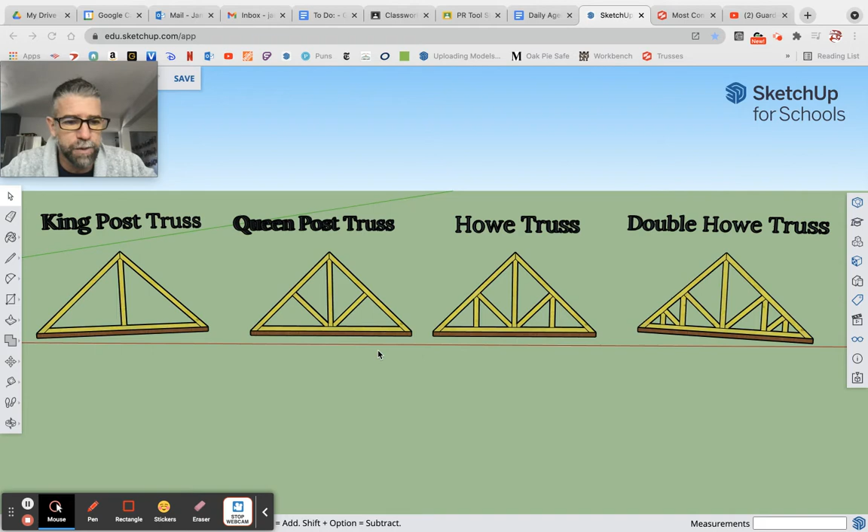It's going to make your life a lot easier. So let's dive in. We're going to start from scratch, and I've got my tools a little messed up as always, so let's fix that.

Let's start with a king post. We're going to build a king post truss, and that's just basically a triangle on top of that bottom. Remember this dark brown? That's actually a roof joist. We're just building the light color on top of it.

Okay, I'm back, had to plug in my charger cord. Now, I did not put dimensions on here, but this is the same as the first truss assignment, which means it's 5 foot. I'll just put it on when I build it. It should be 5 foot from the bottom up to the peak of the truss, and then 5 foot from that center point out to the edge.

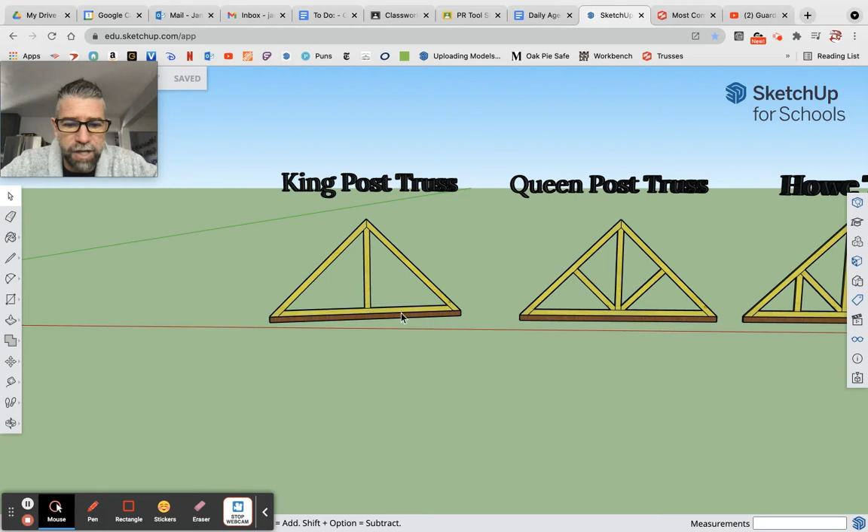And it's just a big triangle on here. Notice that the bottom is a single piece, and then each of the two sides is a single piece, and then the center piece of the truss is on top of this bottom, and it cuts off. It doesn't go in between those two upper ones.

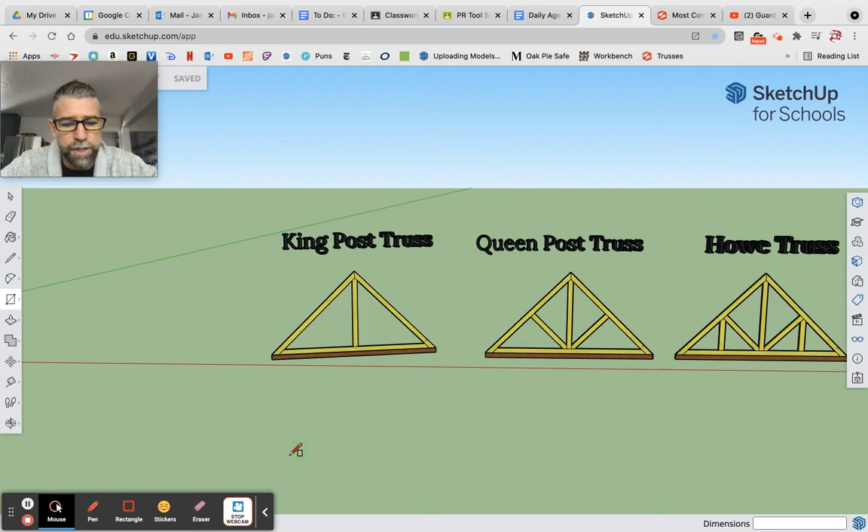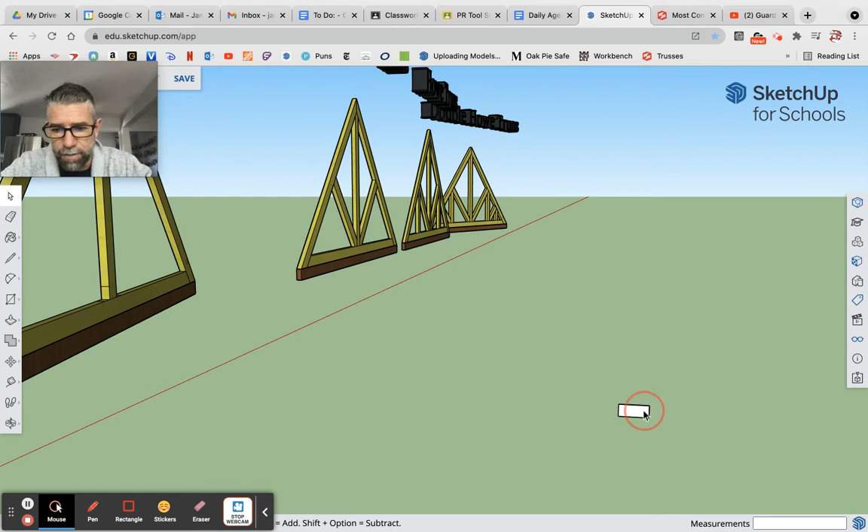We can see it didn't go on end like I want. Easy fix, I'm going to rotate it, or you can use the move key. Move actually doesn't give us the little red arrows, so I'm going to go to rotate, which is the Q shortcut. See how that changed? We need it to be red, yes. Nope, we want the red corner. Give me red, there we go. Red, and then grab an edge, and then just stand it up. There we go. Now we'll push pull it.

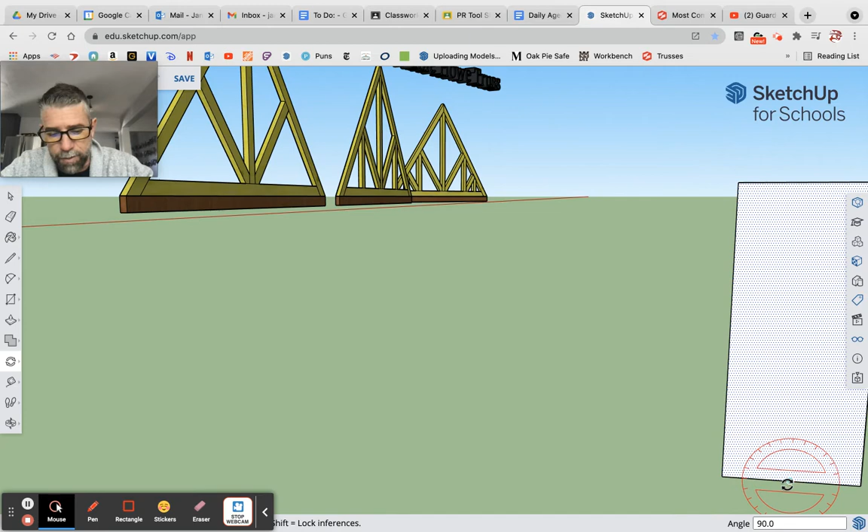Now, since these guys are 5 feet, the truss is 5 feet from center to edge, that makes 10 feet across. So we're going to push pull that guy, make him 10 feet. Don't forget to group it.

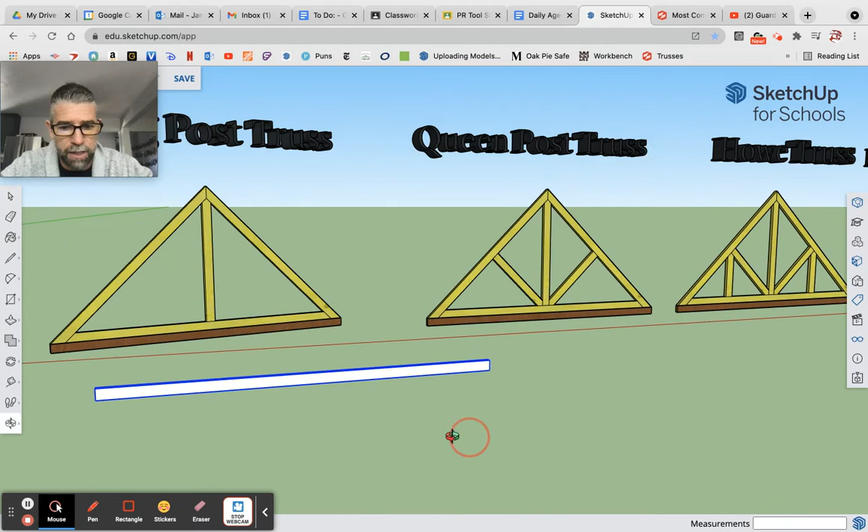And then at this point, we're just going to copy him for all the trusses, so that's the only roof joist we need to make. We'll make him dark so we remember he's not part of our trusses.

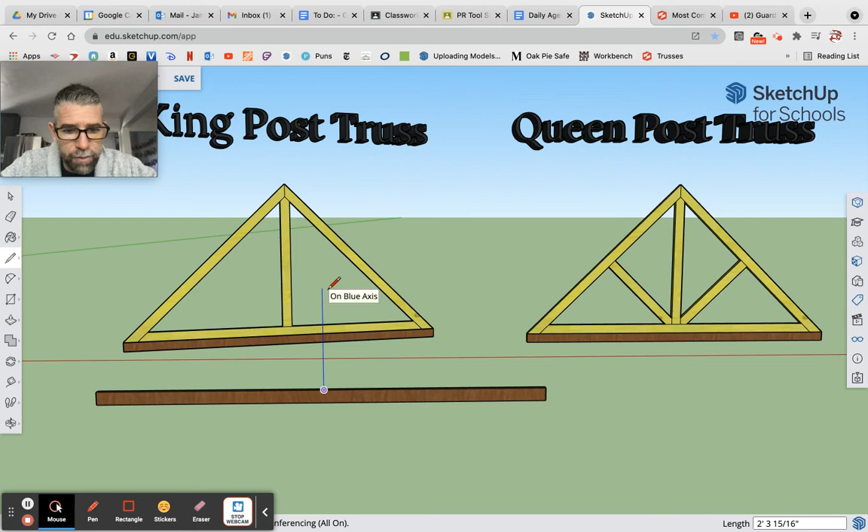Okay, so now you're really using the line tool a lot. We're going to start with probably finding the center point, and we're going to draw a line right in the center there, and it'll tell you when you find center. There it is, midpoint, and then make sure it's blue going straight up, and remember we want 5 feet to the very top. So there's our 5 foot, and then we can just finish making the triangle.

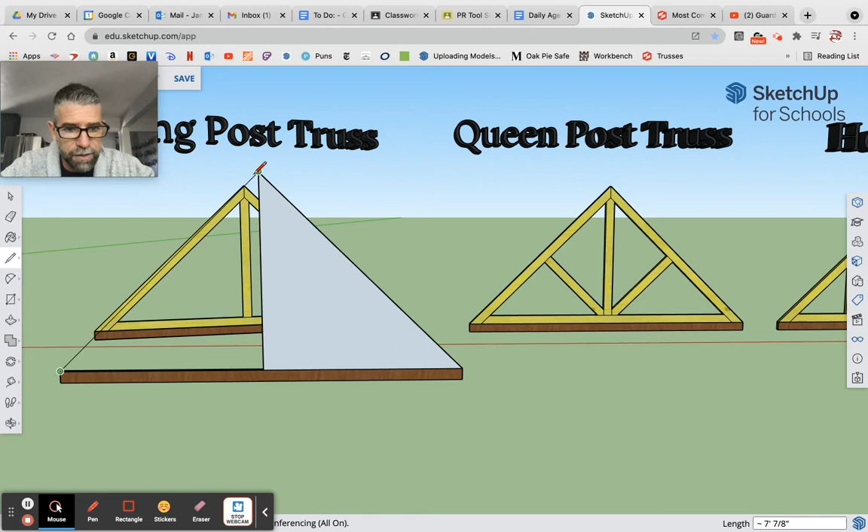Now notice, if you're not careful, you're going to connect to the back edge of that 2x4 instead of the front edge, and then you're not going to have flat planes. Things are not going to work, aren't going to fill in, and it's going to be frustrating. Now I'm going to build it, it really doesn't matter - the first one I built half and then flipped it, but honestly it's probably the same thing either way with something this simple. Now we've got our basic triangle, so let's run some guides.

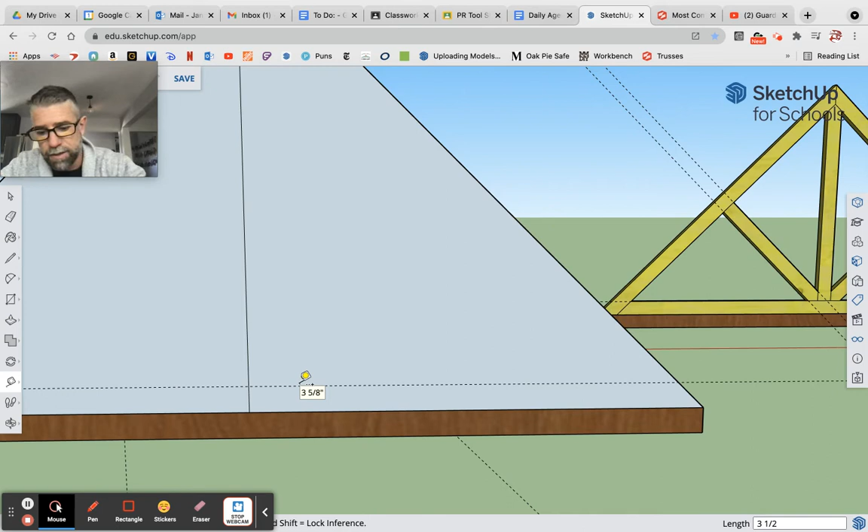So I'm going to start with a guide here at the bottom. Since that 2x4 is going, it's 3.5 on end. There's our line for that. So now I can just run that all the way across, and then just finish connecting it.

I'm just running all the way around. So we've got that guy. And if I erase that a little bit, now we've got that bottom 2x4. Notice here, it should be cut off on the inside.

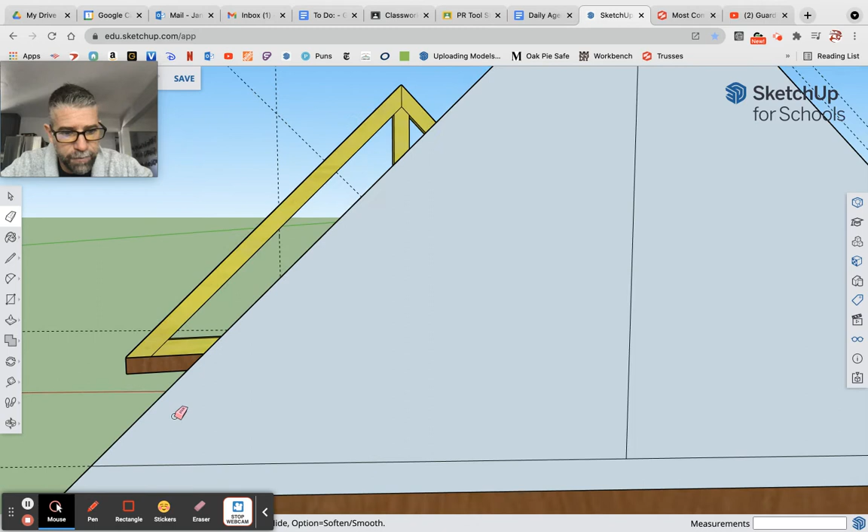So we're going to make our next guide, and we're going to go. Notice the purple says we're perpendicular to the edge. So the little line we're drawing is perpendicular to that edge, running parallel on the face. That's what we want, so you want it to be purple to make sure it's going the right direction.

Again, lots of 3.5 because that's our line. Now, instead of starting here, we could start here, and that would leave the bottom edge as the base of the truss. We don't want that. We want to go from here, and we'll erase the other line. We'll go all the way up for now because you can always erase it later. So we'll erase this guy, and I'm looking at this guy as my example, so we'll erase that.

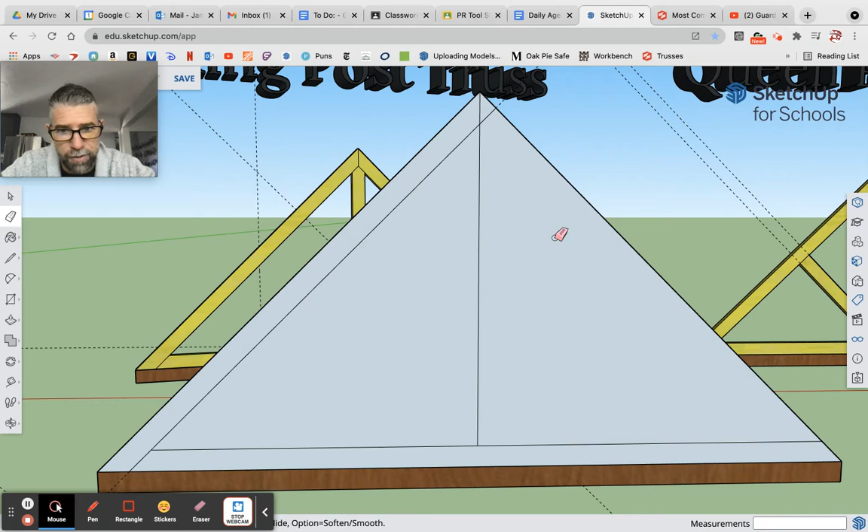So now we've got our bottom 2x4 and then our side 2x4. We'll just do the same thing on the other edge. Again, it's purple, 3.5. There you go, draw the line.

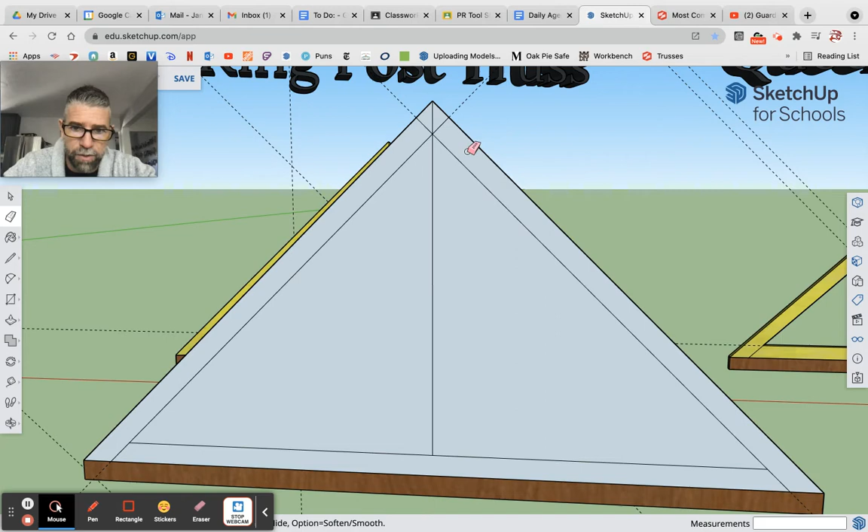At this point, I'll erase this piece here. So notice we've got our 2x4 on the bottom, we've got both of our two side piece 2x4s, and then at the top we've got to erase some stuff. They're going to come up to that peak right there. So we're going to erase this guy and this guy, and there we go - we've just got the two meeting at the top.

Now, this has to be split into a 2x4. That line is right down the middle of the 2x4 that makes the truss. So when you do your guides, you can't do 3.5 - you do half of a 3.5, which we talked about in the last video. Do you remember what half of 3.5 is? Think about that.

Remember, we do half of the 3, then we take half of the remaining half and add those together. Half of 3 is 1.5. Half of the remaining half is a quarter, so that 1.5 plus a quarter is 1 3/4. Now we can either do another 1 3/4 from the middle, or we can do a full 3.5 from the outside edge. Either way will give us the other guide.

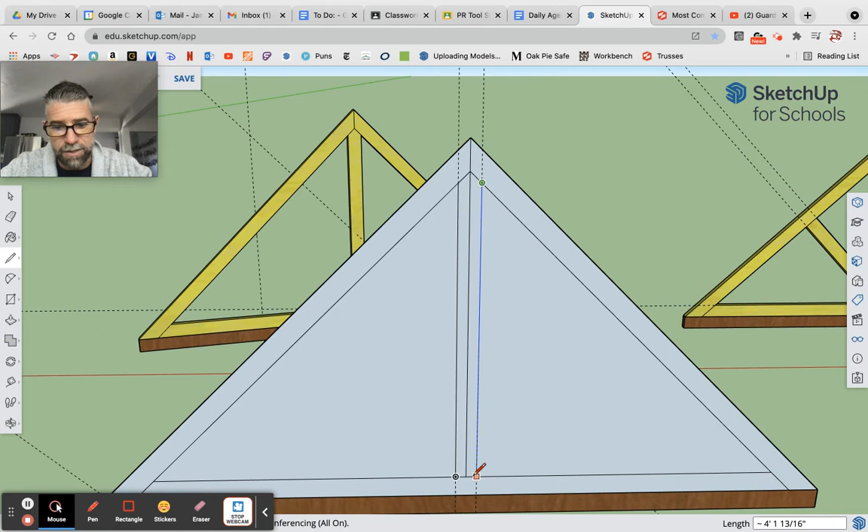Finish those lines, and we're not going to go down here because we want to leave that a solid 2x4, and we're not going to go above that. I'm just going to trace around here - probably didn't need to because it's all just a face right now. And erase the middle. Okay, so that's what you want.

And if we turn off our guides, it looks a bit cleaner. There you go. If we delete out these two, we've got our basic king truss. We just need to add thickness to this guy.

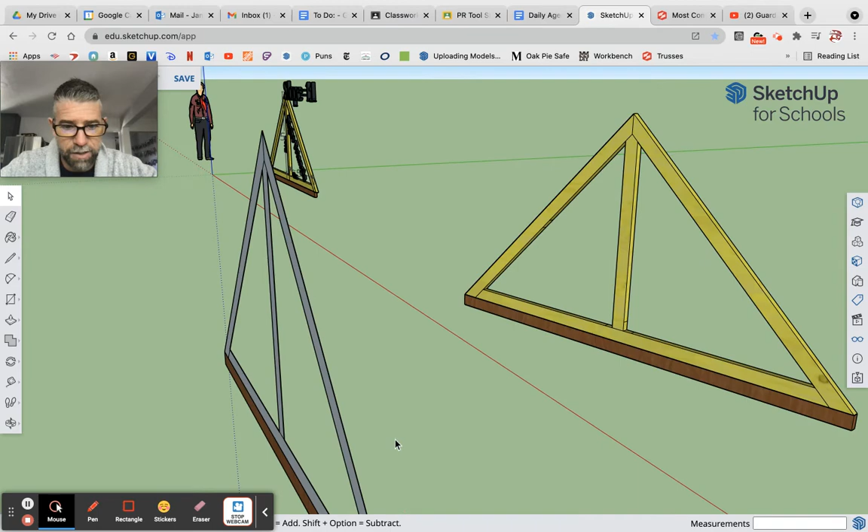Okay, he's still flat, so get to where we can see that edge. I like to do push-pull from the front. And it's just not letting me. Sometimes my rotate tool is a pain in the butt.

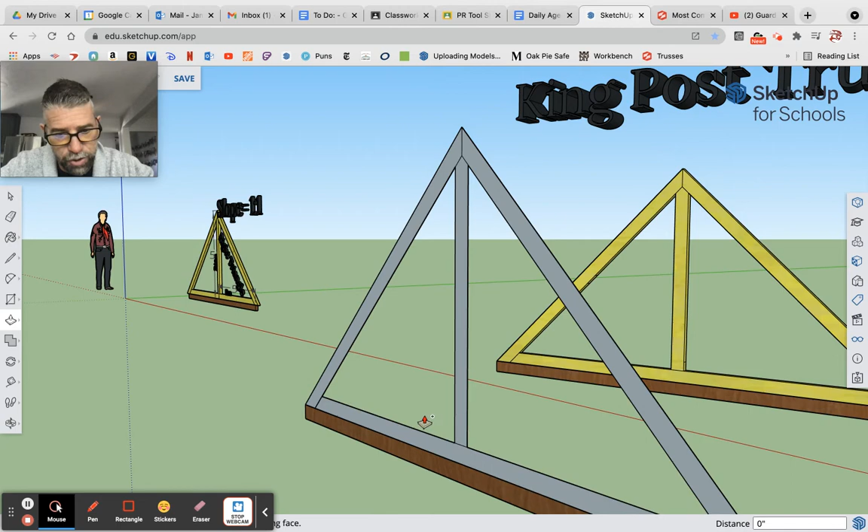So we'll start with the bottom. I can't see - now notice it's taking away the front face. Easy fix, hit Option or Control - it's Option, now it's there. I have to rotate around because I can't see the outside edge.

And there we go. I think I probably will go from the back to push-pull these, but I have to look and make sure the faces are staying there. Just do all 4 of your pieces, and make sure that the faces are staying there. See, that one's not, so I had to fix it. But now I can see the outside. There you go.

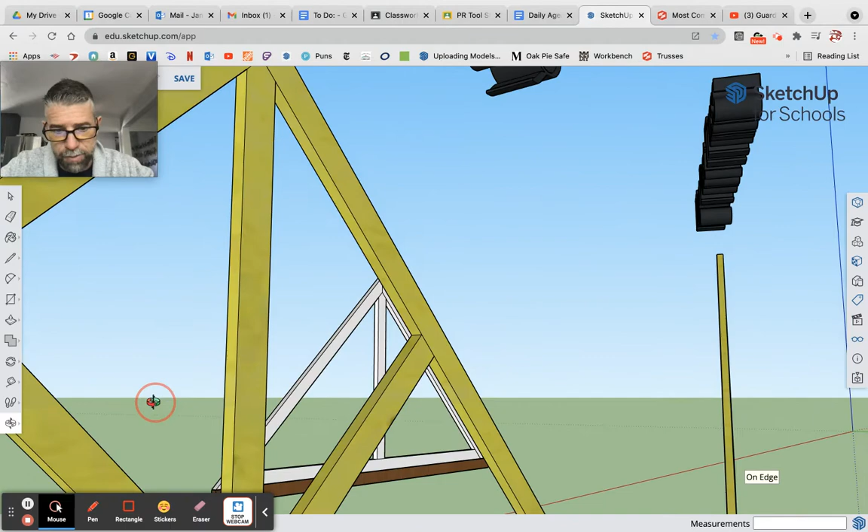And it won't let me get to that edge. There we go. Now don't worry about the colors, we're just going to paint it all wood texture anyway. But there you go, that's a king post. You just got the simple triangles, okay, just a simple triangle and one going up the middle.

Go ahead and group the whole thing. Don't forget, group it, texture it. We're done, okay, there's our king post.

King post truss, just like the original. We could just get rid of the original. And there you go, there's your king post. We'll just build from here.

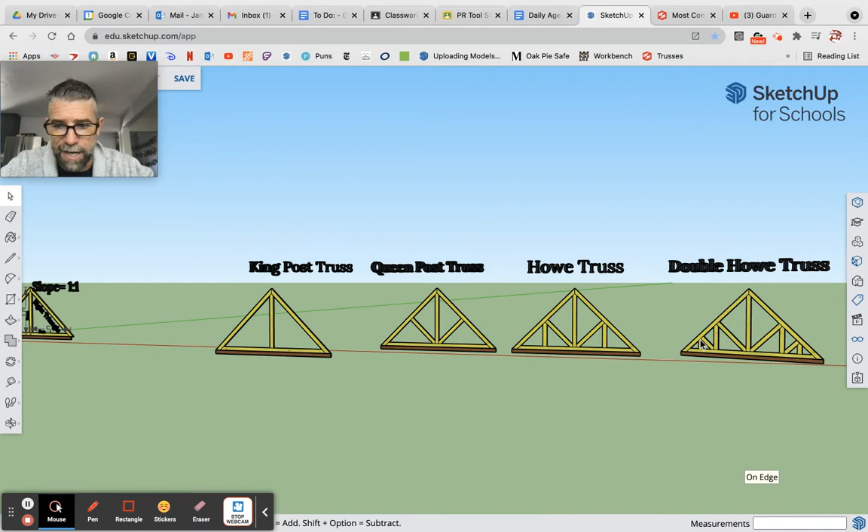Now these do not need to be created from scratch. Do not waste your time. Take him, grab this guy, and I'm just going to do a move on these two. Move them over here.

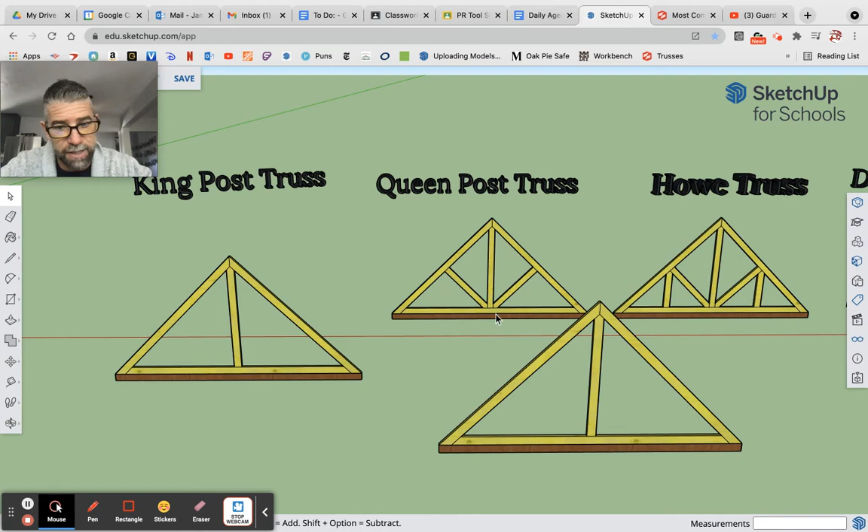And again, if we look behind, we're just going to take the king and turn it into a queen. All you need to do is add these diagonals here. So if we're going to go in and add those diagonals, we're going to go to the midpoint.

So start a line, and again we just need to find - there it is, there's the midpoint on that line. And just right to that front corner. And we're only going to do it on one side, then we'll just copy it over for each of these from here on out. All we need to do is add that one 2x4.

Now notice this is the middle of that 2x4, it's going right into the corner. So you don't want to do 3.5 because then you'd have it offset and it wouldn't be right in the corner. So do again half of the 2x4, which is 1 3/4. You're probably going to memorize that number pretty quickly - 1 3/4 is the half of your 2x4.

Okay, my guide disappeared, what happened? I need to turn my guides back on. They just get a little messy, they get everywhere.

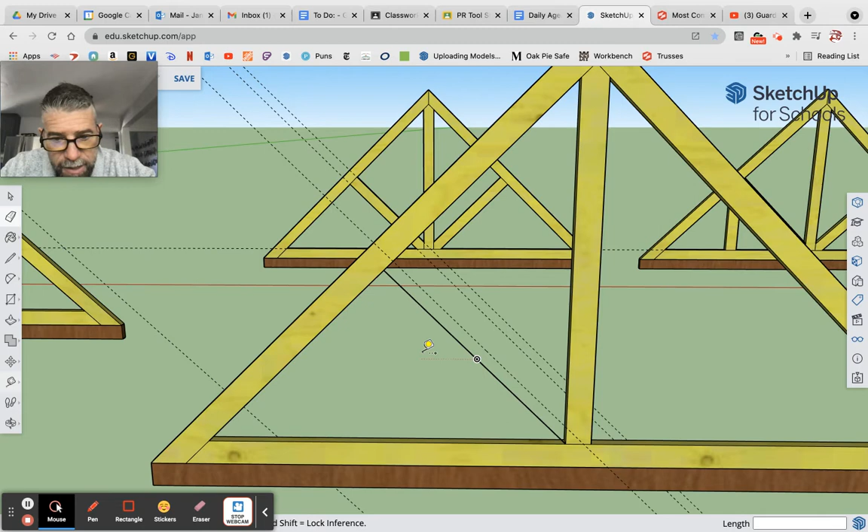And then from here you can either draw the full or draw another one from the other side. And I don't know why I'm not seeing the guide. Let's try that again - there we go. A purple, then you know you're heading in the right direction.

Now you need those extra lines. You're going to connect and just draw all the way around - you're outlining that whole 2x4. And once you do that, it'll all appear.

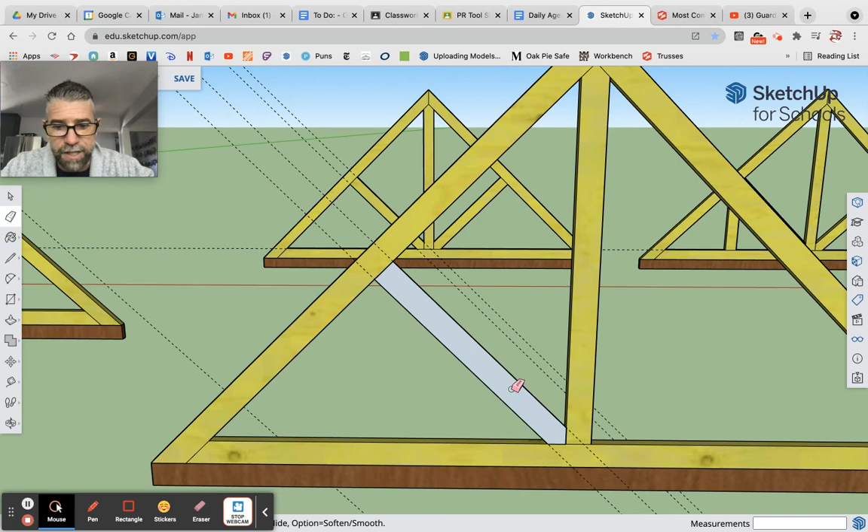Okay, and if it's not, just there's somewhere you missed a line, just go back and redraw it. Okay, erase the center - there it is. Okay, really easy - push, pull, give them some thickness. Any edge that goes there is fine.

Now I'm going to group this guy because I'm going to move him. We're going to ungroup it again in a second, but I'm going to group it to move it. I'm just going to grab the corner, move it over. Don't forget to copy it.

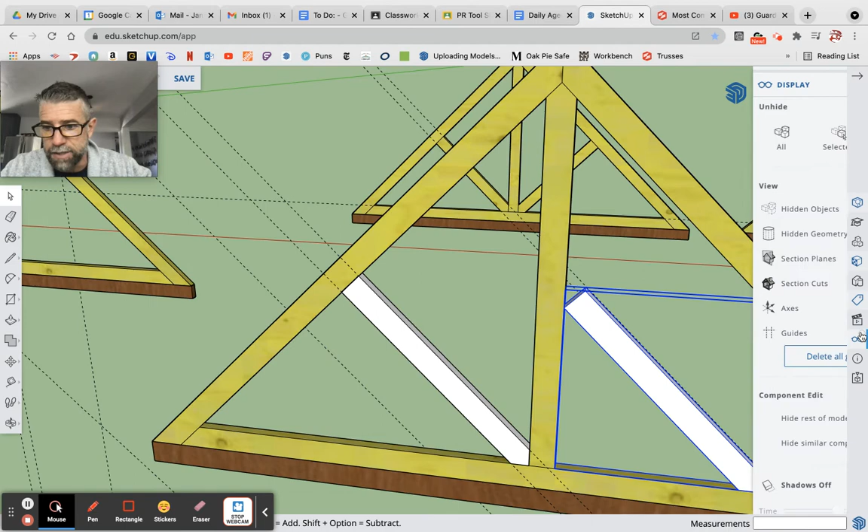Now let's get rid of guides - they're super annoying when you don't need them. Now notice that's obviously a problem, so we have to rotate this guy, okay?

Easiest way I think is just use the move, and then you can just click any one of these red pluses. You just do a 45-degree rotate, and boom, there you go. Or is that 90? It's probably 90.

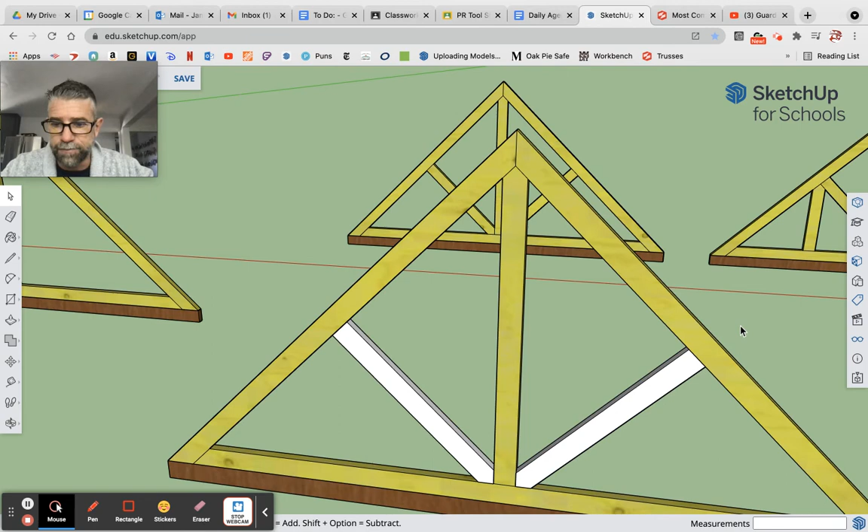Now notice that these guys are grouped and the rest of your truss is grouped. Rather than have individual pieces, I just want all of this to be one group. So what I'm going to do is explode the group of that guy - I'm going to explode that group.

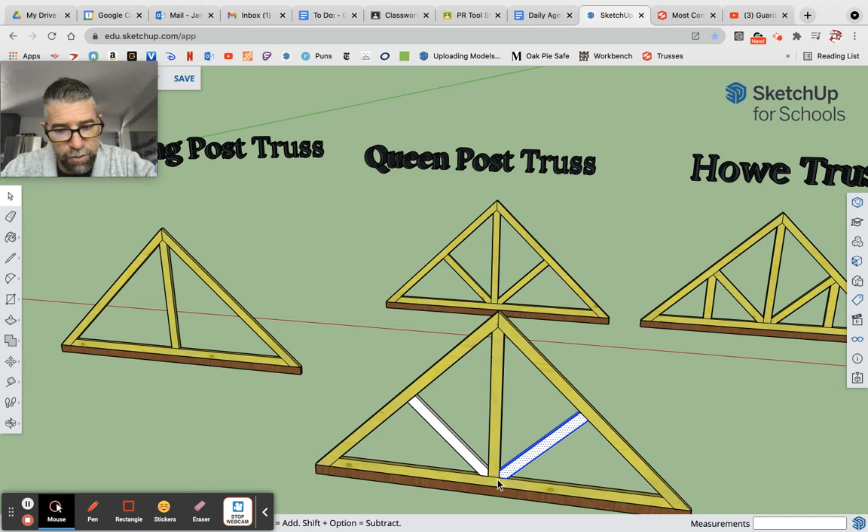And you have to make sure any groups you explode, whatever they're touching that also is not a group, it'll merge together permanently. So for instance, if I forgot to group this roof joist and then I ungroup the rest of this, it's all going to merge into one piece. So I'd want to make sure that guy stays grouped.

He is, so now I'm going to ungroup, I'm going to explode the rest of the truss. So now the whole truss is exploded. So when I triple click, it grabs everything here and I can regroup it all as one big item.

And now I can texture it, and anywhere I texture it, we'll color the whole thing. So you're good to go. So there you go, look at that - we now have a queen.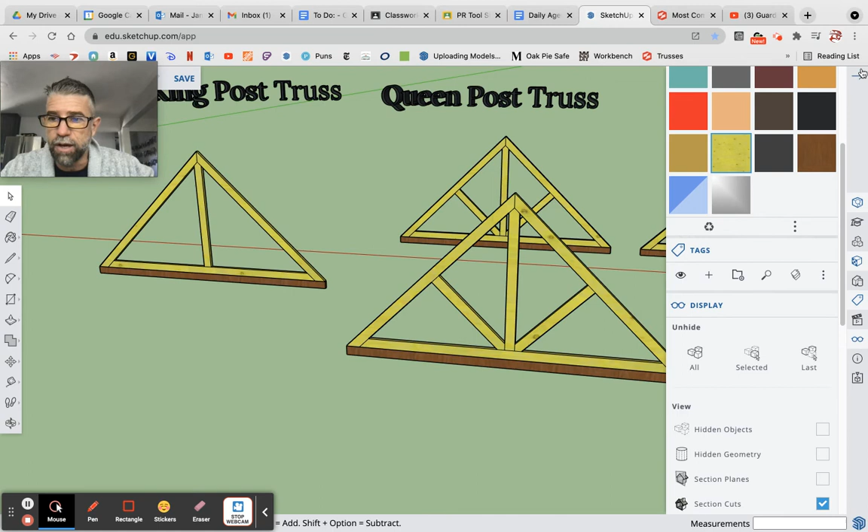We don't need that queen, we've got our own queen. And there you go, so you've got your king post and we've modified it to queen.

At this point, a lot of you are probably saying, Mr.

A, I don't need you anymore. Well, you know what? That hurts my feelings.

Okay, notice when I try to grab this top left, it doesn't grab. Remember, going top left to bottom right, that's going to only grab what's fully inside. If you go bottom right to upper left, anything it's touching, it'll select. Okay, so I'm going to grab both of those, and I'm just going to do another move copy.

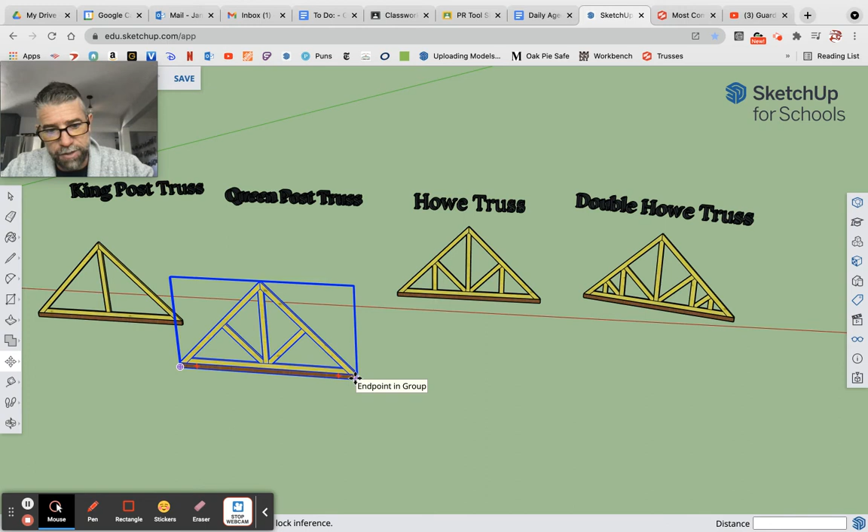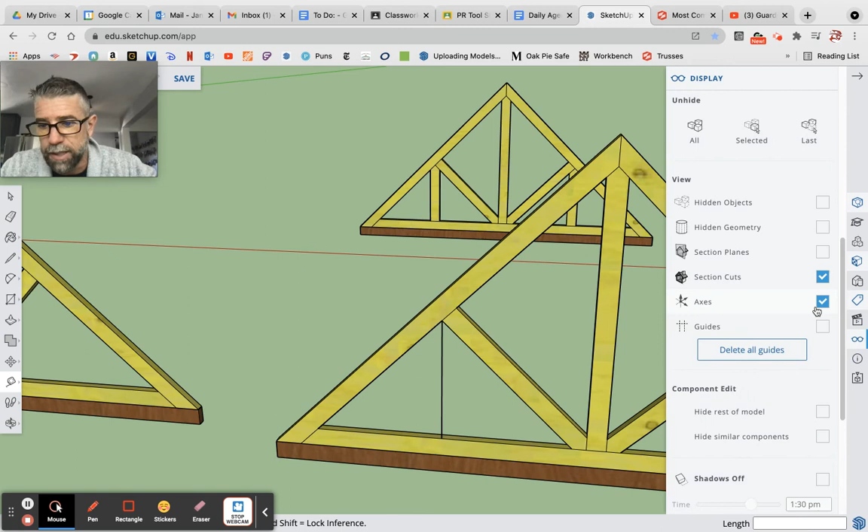And now we're going to make a Howe truss. And notice all we're doing now is adding a vertical beam right into these corners to reinforce them. And I bet you know what we're going to do. I'm going to go straight down and just make sure it's vertical. It's going to go to the midpoint of that remaining section. And then we're going to turn our guides back on. And I'm sure you know how to do this.

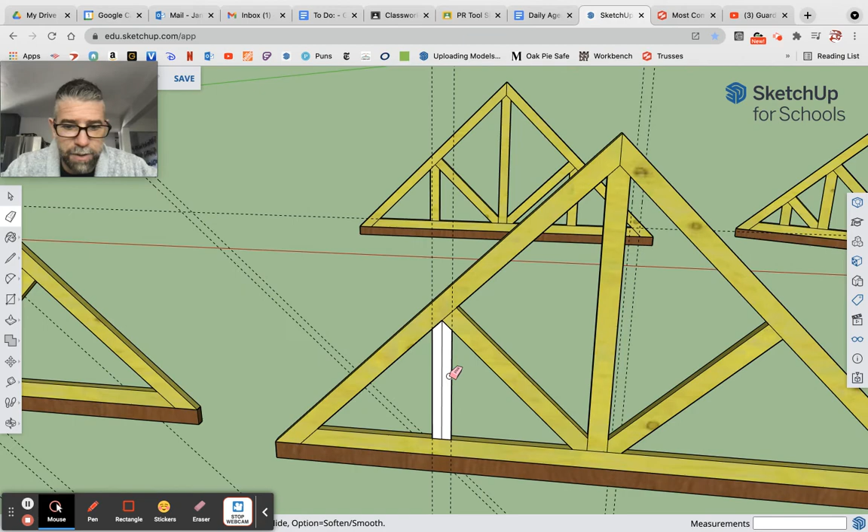Okay, somewhere I'm missing a connection. There you go. You notice it happens to me too. It doesn't quite fill in, so just keep going until it does. And then at this point, I think you know the drill, guys. Push, pull it, make it a group. We've got the one. And let's turn off all the guides. We're going to copy it over.

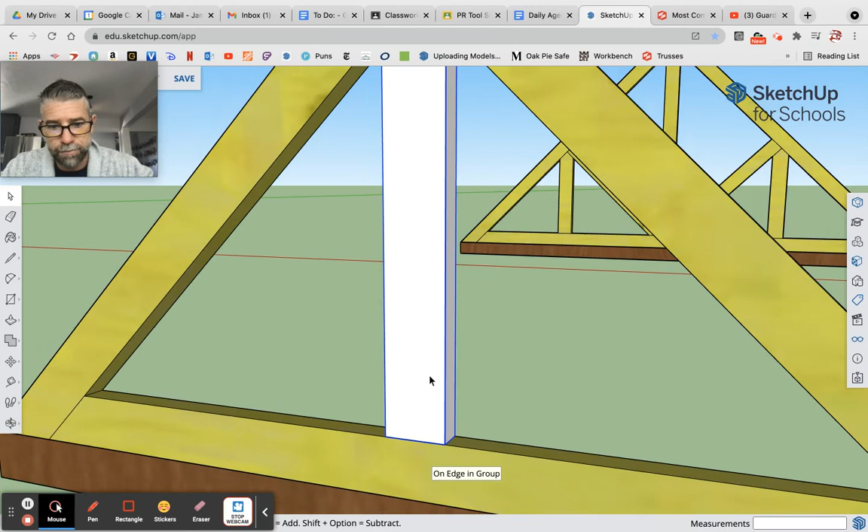And in this case, I can grab various places to move it. But you know what? The way that I know it's set in place is if it's right in that notch. So that's where I want it to snap to. That's where I'm going to grab it to move it. Okay. Man, these are sensitive controls sometimes. So now it'll snap itself right in.

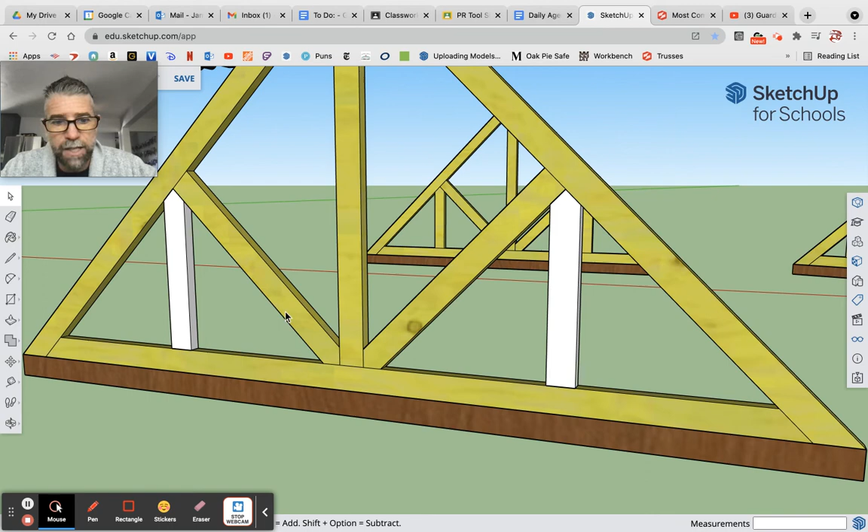And now again, to put everything in as a total group, I'm going to explode each of the three components, and then re-grab everything, color it, and we're done. Boom. We don't need that Howe truss.

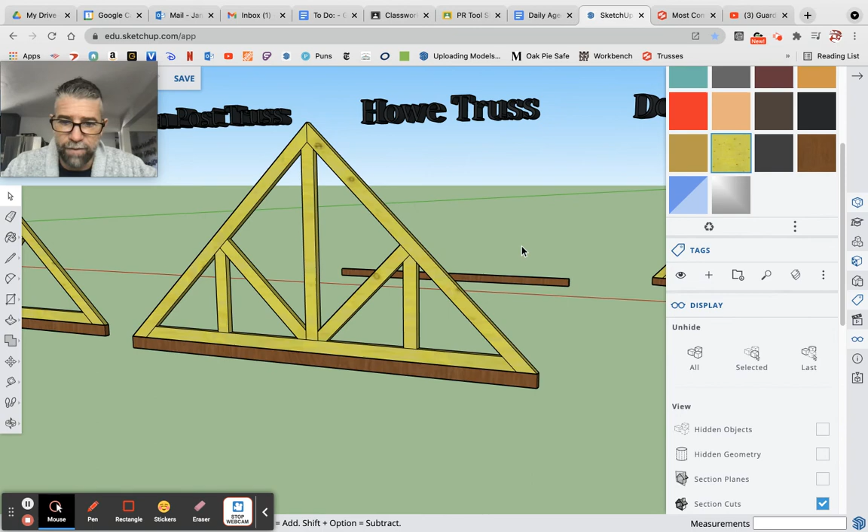We have our own. How did you do that, Mr. A? Because I'm amazing. All right, I think you got the drill. If you're still watching with me, you're welcome, but I wouldn't be surprised if I'm alone at this point.

I'm going to move it, and I'm going to make another copy. I'm just going to do this one more time. So if you look at the double Howe back there, we're just adding another 45 and then another vertical off that. So let's do it.

I feel like I need some music in here while I'm working. I feel like the Bob Ross of construction.

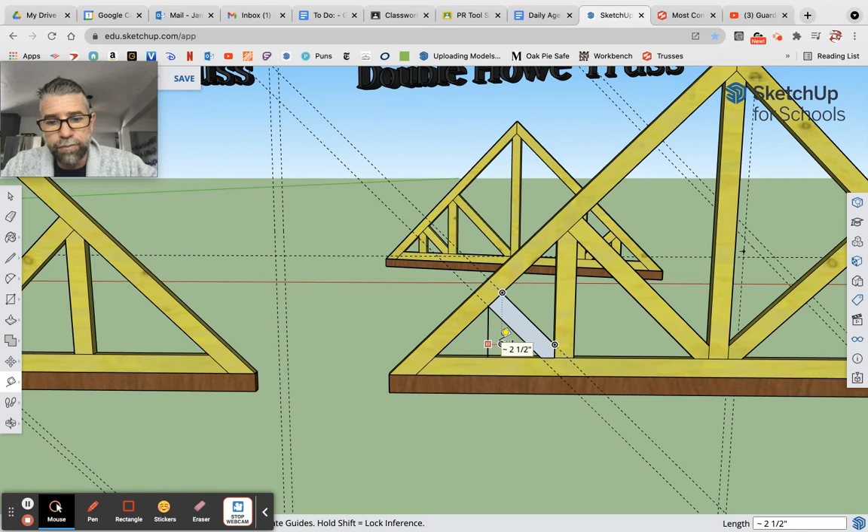Okay, there's the first one. I think I'm just going to draw that second one, and they'll all be grouped together anyway, so. Sometimes it does not want to create a guide. I don't know why that is.

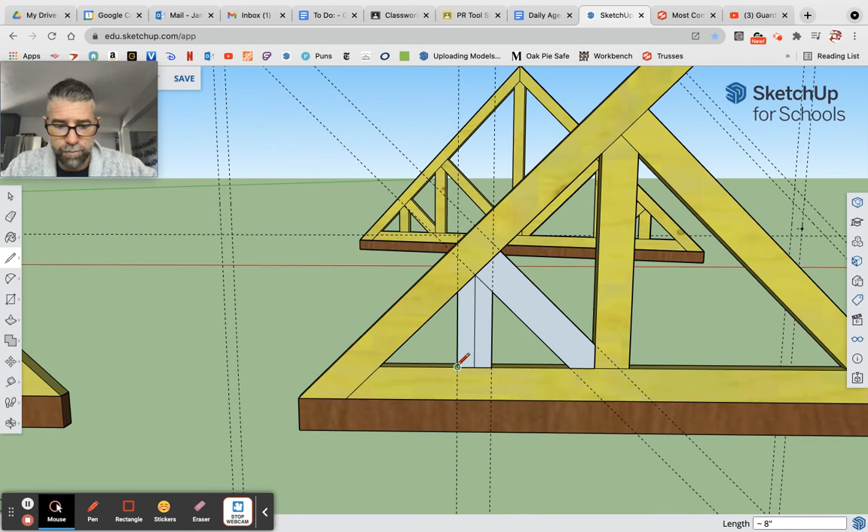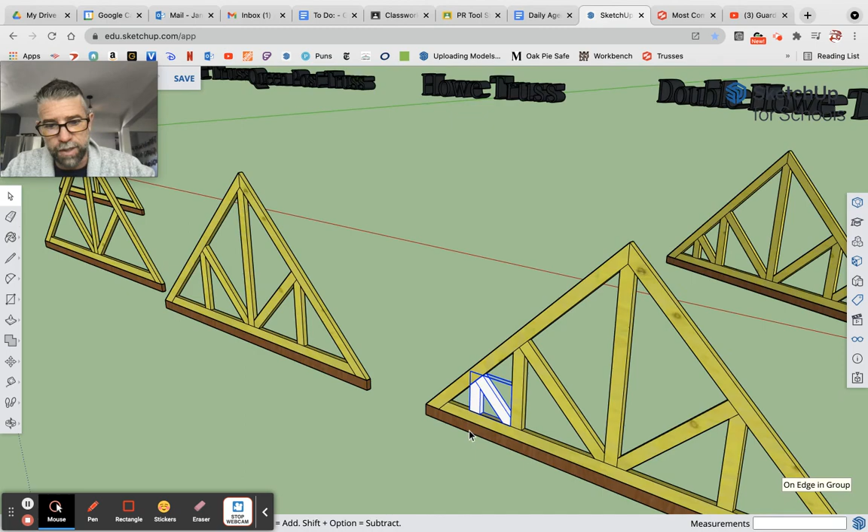All right, let's get rid of those guides and then pull these guys out. Notice you can go anywhere that you can touch that outside edge. It's gonna do that. Okay, all of that's gonna group together, which is fine. We're gonna move it over, and then we're gonna be done.

Obviously, when you move it into that corner, it's not how it should be yet. Do the rotate. There's multiple ways you can do this. Let's see. I need to rotate it. Top of my head, what am I doing here? We're rotating at 180 degrees from the top view. So I would probably just use move.

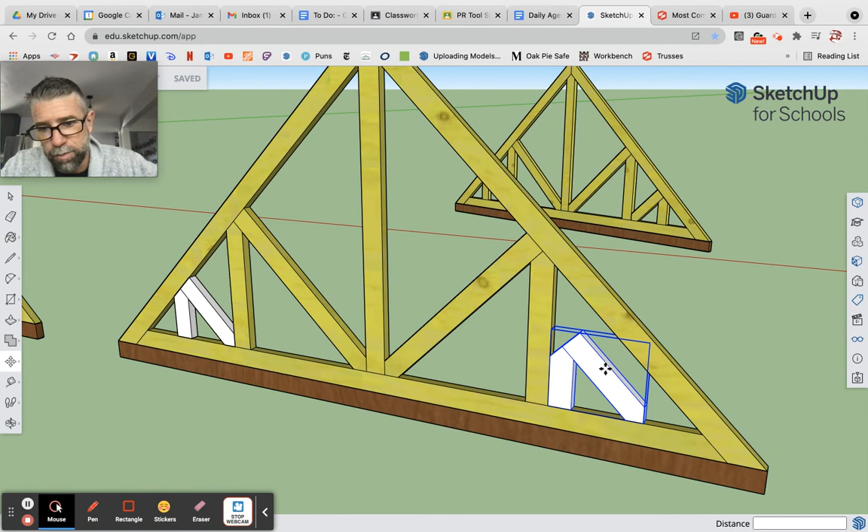I'm going to look at the top and notice the little red pluses. They're on the front. If I click one of these, I don't know, will it help? Yeah, no, it looks like it's going to help, but notice it doesn't get us in the right oriented direction. So you need to go to the top and notice the pluses on the top. They'll give you a different direction to rotate, and that's the one you want.

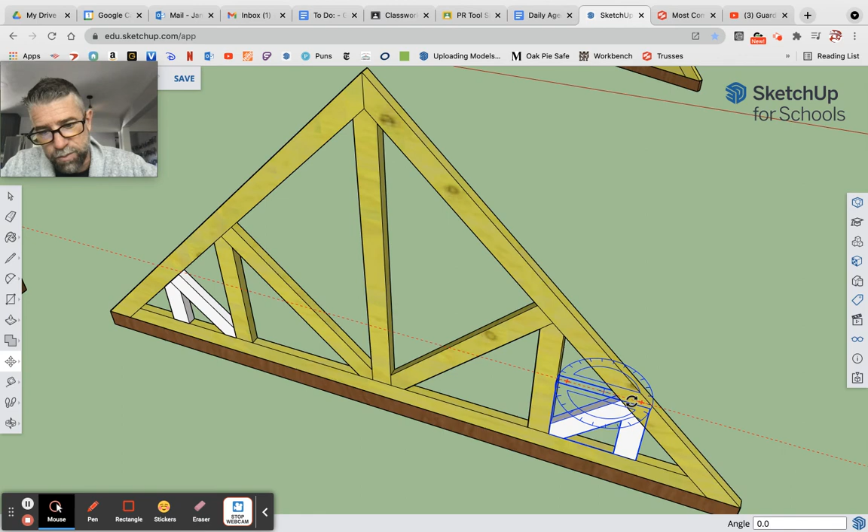And then we can see, boom, looks good. And you know the rest. Explode your groups, recombine them, and you're done.

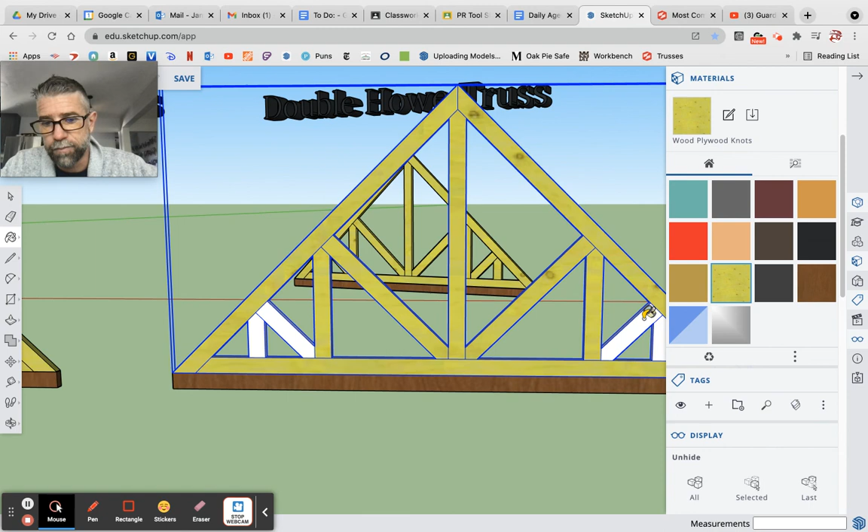Okay, last thing. Do your name conventions on all these guys. Give them all a name. I want to know, that's your vocab. So up above each one, just like I have here, line it up a little bit better, like I had originally. You know, you can just move all your little name tags above each guy. And then take your screenshot.